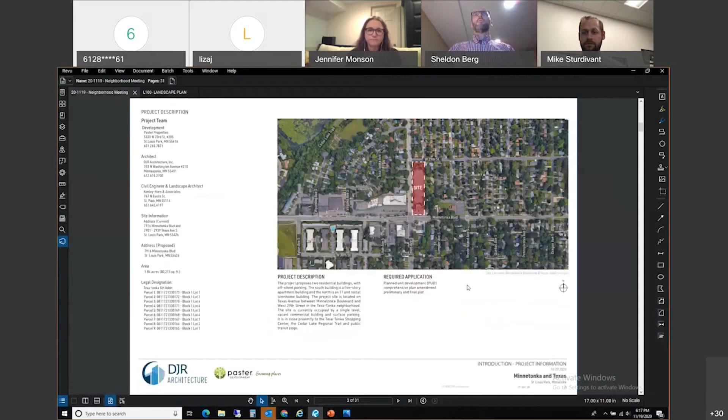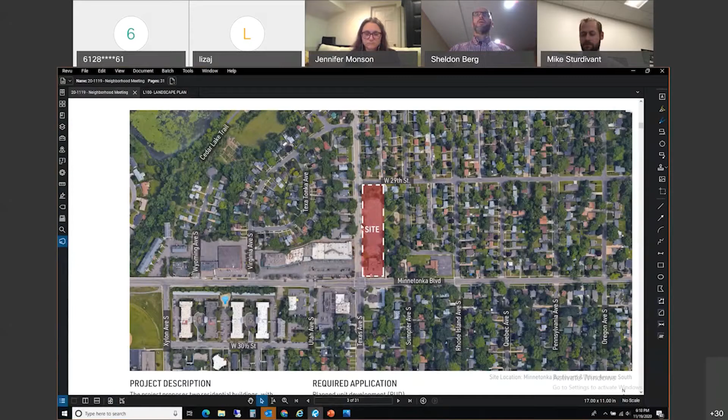Let me just page through a couple things. So just a sort of an orientation thing again, we're just on the east side of the Texa-Tonka shopping center, and then obviously just north of some of the other restaurants like Walk in the Park and things at the corner. We are developing the whole site that encompasses between Minnetonka Boulevard and 29th, just to the east of Texa Tonka. And then there'll be a link here in the middle to Rainbow Park as well.

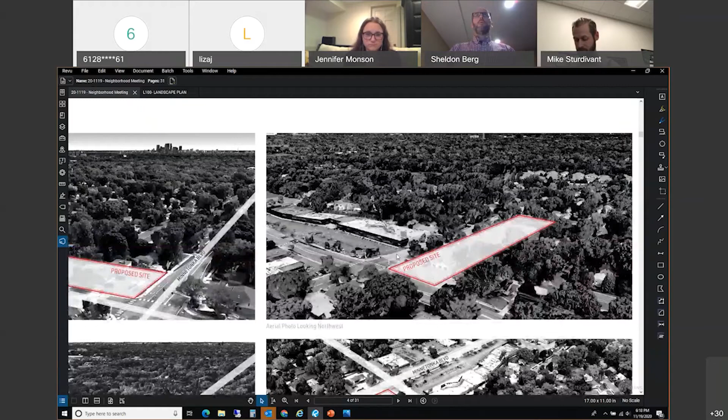Just some quick aerial views of where the site is. I'll jump through some of these fairly quickly because being with the neighborhood, you understand a lot of the context.

From a zoning perspective, the front half of the site was C2, now recently rezoned to C1, which is a little bit lower scale commercial use. The back end is currently R3, and we're rezoning the whole site together. All the units will be rental at this point, including the townhomes, and there's a total of 112 units that we're looking to add.

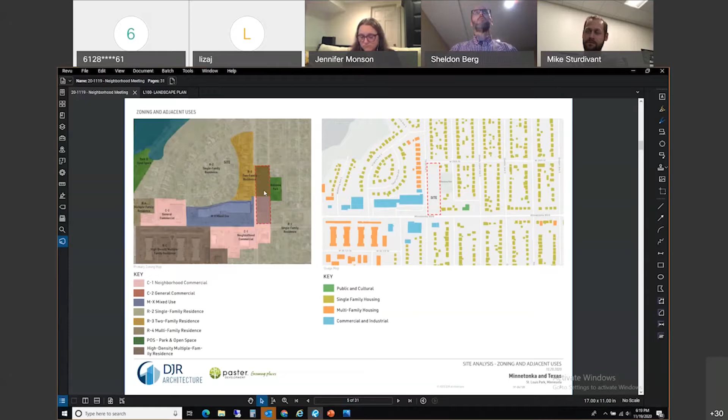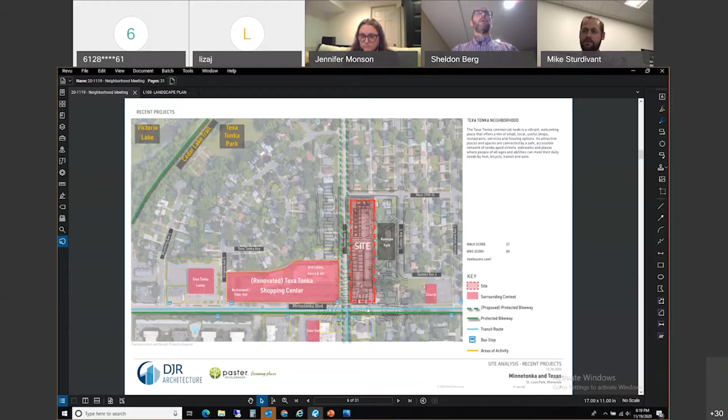Reiterating some of those points, we have some fantastic links to neighborhood amenities, to the Cedar Lake Trail, and to the bus lines along Minnetonka. We're hoping and planning for a lot of the new residents to take full advantage of those amenities.

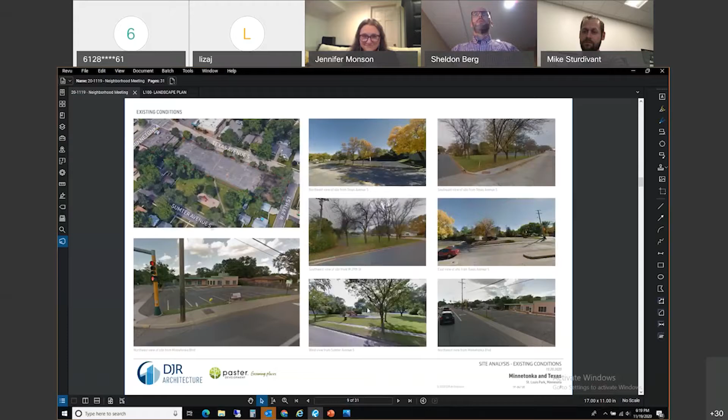Just some views of the neighborhood. I'll flip through some of these fairly quickly. So, a little closer look here. Hopefully everyone can see this okay.

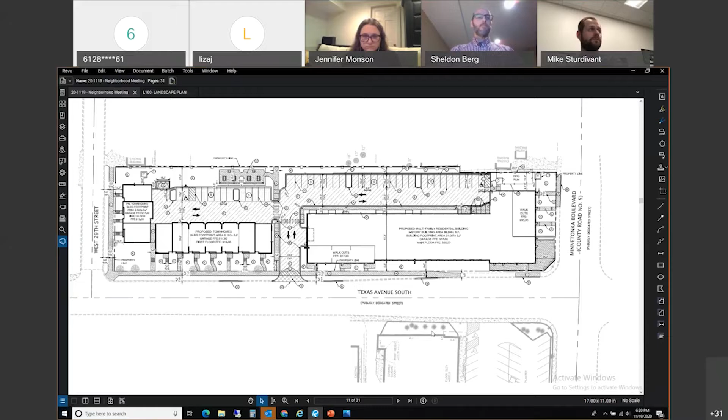Just to talk about the scale and context, let me zoom in here a little bit. As far as the setbacks of the buildings go, the townhomes set back about the same as the twin homes and other houses along this side of the street on Texas. We're actually set back even further than some of the single family homes to our east along 29th. Along Minnetonka, we're about 30 feet or so back from the street, which allowed some landscaping and front yards for the 3 units that we have facing the street.

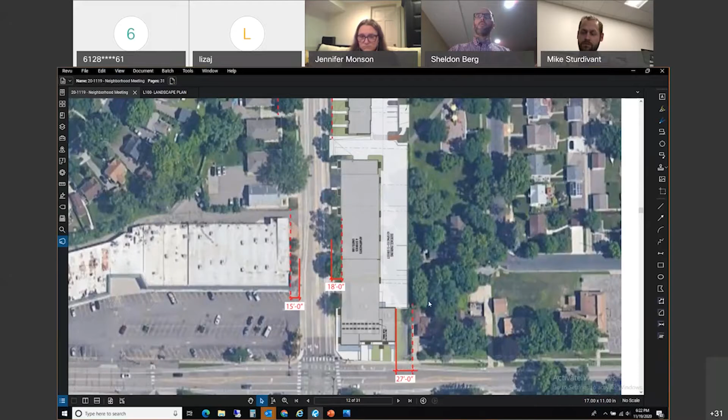We have a lobby space and some amenity areas along a little public courtyard out in front. On the side here, we have landscaping and a little dog exercise area, with some surface parking directly behind the building, which will be bordered by a fence and additional landscaping between the parking and our property line, which also borders a couple houses as well as the park.

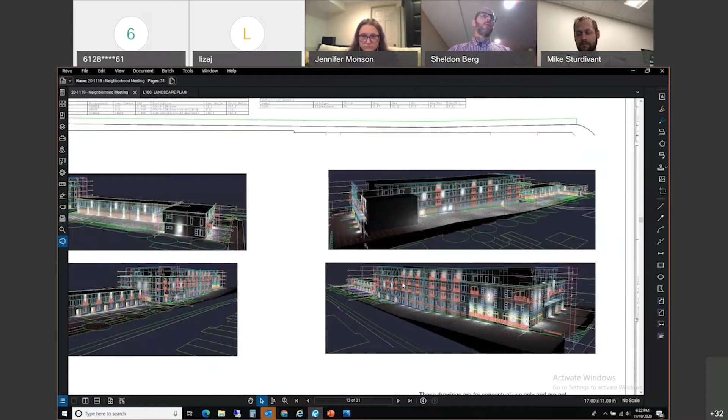So let me just move forward. This is a lighting plan. It gives a sense of some of the surface lights that'll be around the balconies, as well as some lighting around the back. I think the balance we're trying to strike is where it's lit enough that it feels safe for everyone, yet not so much lighting that it goes out into the neighborhood.

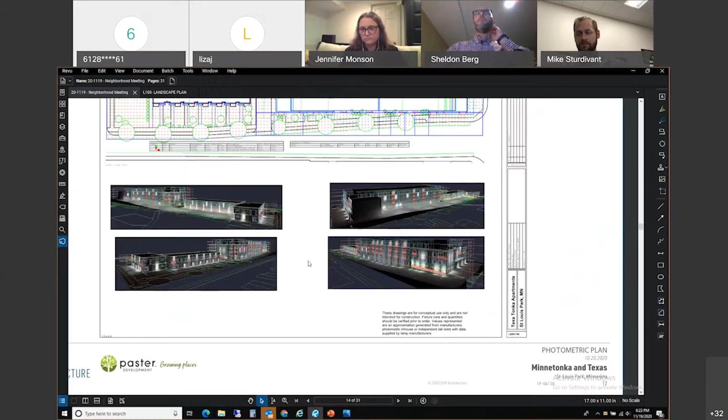One of the primary things we look at when doing a new building in a neighborhood, especially when adding some height, is how the shadows affect the neighborhood, what the surrounding houses and other buildings are like, and what effects they may have. The city has a standard to follow, where any new construction shouldn't shade more than 50% of a face of a neighboring building for more than 2 hours between the hours of 9 and 3.

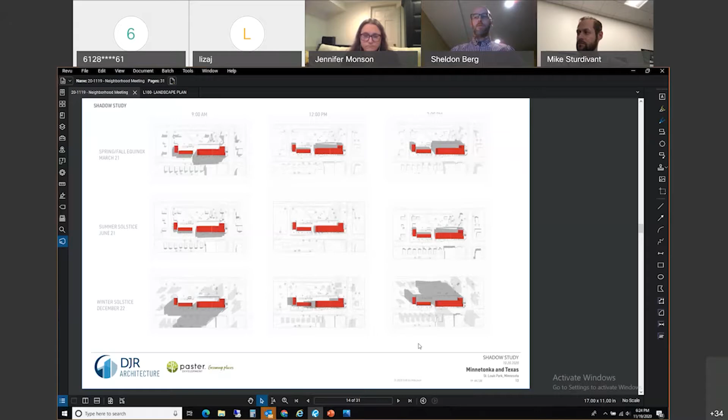This gives a general sense, starting with 9 a.m. here on the left side in the spring or fall. Summer, of course, you get a lot of high sun, so not a lot of shadowing there. On the right side, it's sort of that afternoon comparison between spring, summer, and winter timelines. I have a little enlargement of some views of that too, showing all the housing around here.

I think what you can probably see is you get some shadowing from the shopping center onto that house behind, but we have a lot of benefits from both the street bounding our site as well as the setbacks that we have, so we're really not impinging on any other neighbors from a shadowing standpoint.

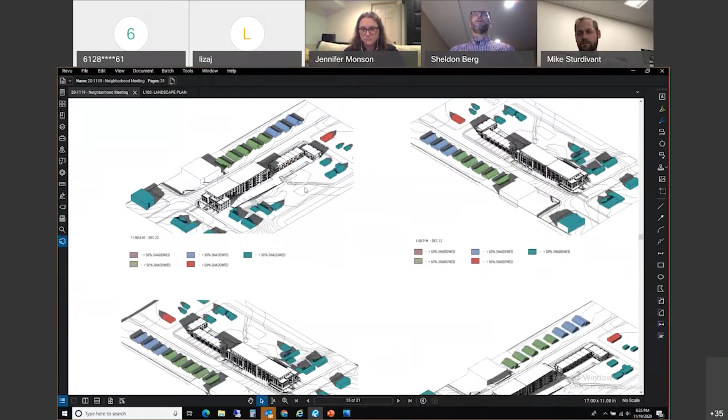I'll run through the plans briefly. Each of these townhomes has a walkout to the street. This just shows the buildings themselves, and then the parking behind in your garage.

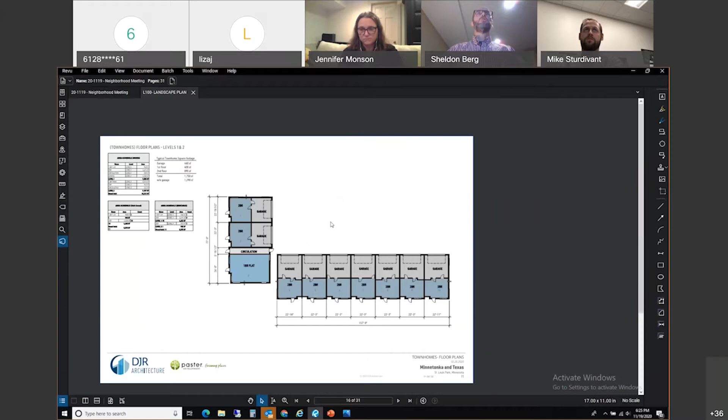Briefly, while we're back on the site plan, I'll make a slight change in what I'm showing here. I think it's easier to understand some of these things if you look at the landscape plan, so you can see some of those improvements rather than just a plain site.

One thing I'll also point out is currently there's quite a number of curb cuts on this site. There's one up here off of Minnetonka, one right around the corner as you turn onto Texas, and three more along the property.

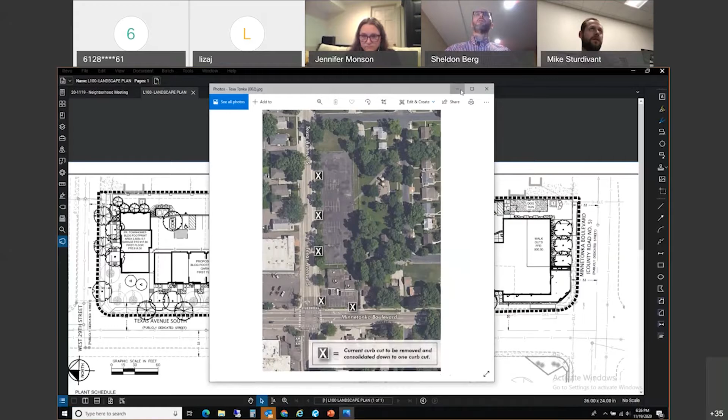If everyone can see this okay, this indicates all the ones we're taking out. There's 5 total today that we're taking out, and we're consolidating them into one here about midway through on Texas Avenue. We were very thoughtful in wanting to maintain that connection and keep the traffic as close to Minnetonka as possible, so there's really no reason for any of the residents to go into the neighborhood unless they're on a bike and want to get on the bike lane and go up to Cedar Lake Trail.

The other thing I'd add is, I think folks who have traveled in the area thought it was really important to remove especially some curb cuts along Minnetonka Boulevard. That'll just help the flow of traffic at the intersection.

You'll notice, though it may be hard to see on some screens, in addition to all these heavier black outlines showing the new trees we have, we're also saving quite a number of the good trees that are existing on the site currently. That was part of the site design, and part of our intentions going forward is to save as much of that canopy as we can.

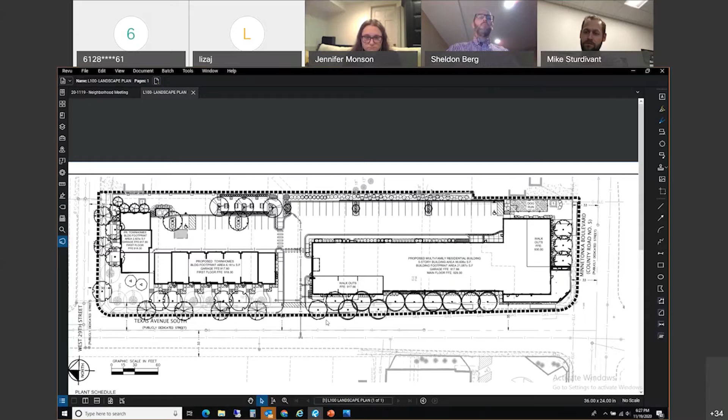So moving on, I want to run through the building elevations. These are the townhomes, and we have along the front a fair amount of brick on each of these houses, with a bit of an accent piece at the entry doors to add some artistic flair to them.

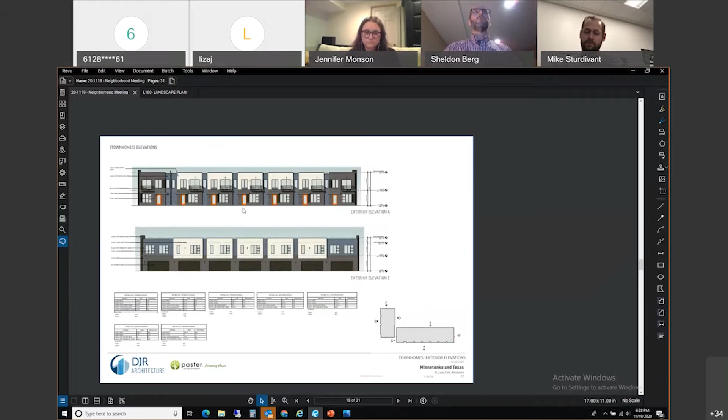A major part of our design as we were looking at this project and the Paster property, a large part of it had to do with looking at a lot of examples of mid-century modern projects as precedents for what we're doing with the building. This is the side that faces 29th, and then this is the connection point in the back, and there's also some link areas along here, and this would be an elevation off the end facing back toward the neighbor.

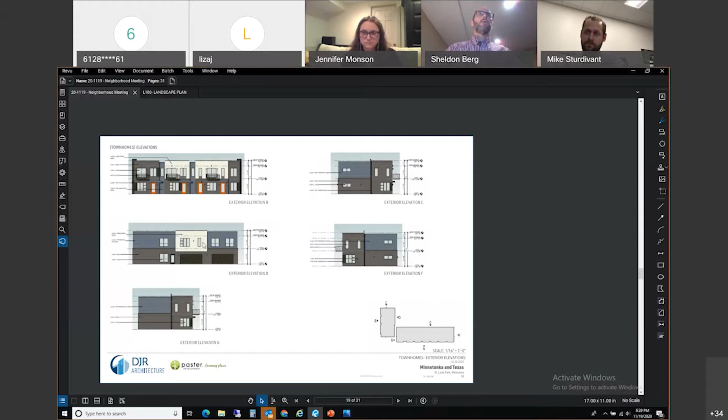In terms of materials, they're fairly consistent between the two buildings, the townhomes and the larger building: a base of brick, with siding in a couple different colors, a really dark blue and a very light gray as well. The metal for balconies and things like that will end up being probably much closer to a black color.

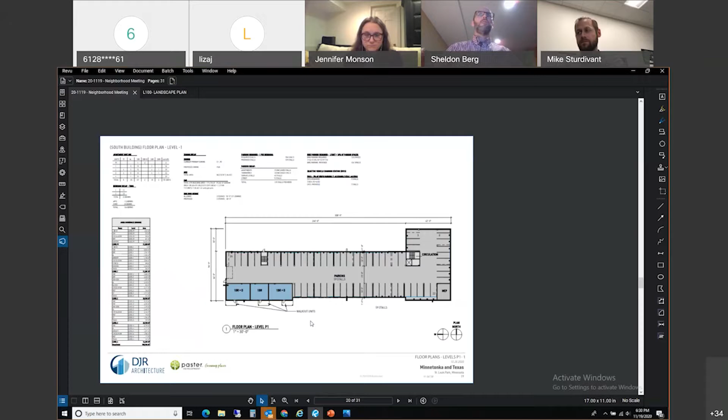This gives a sense of the parking underground because of the way Texas Avenue drops in grade as you go north. This whole portion up here is buried, and then you start to see part of that garage. We've also introduced 3 walkout units here that have direct access to the street to help add some vibrancy to that streetscape, as well as giving more opportunities for those types of units.

And then the main level, where you enter from Minnetonka Boulevard, there's an outdoor patio here with some amenity spaces at the corner, and then some more units that can walk out to Minnetonka. Like I mentioned before, they have a pretty good setback from the street, so they're not going to feel like they're right on the road. Gives them a little privacy as well. And then there's some additional units back here toward the north.

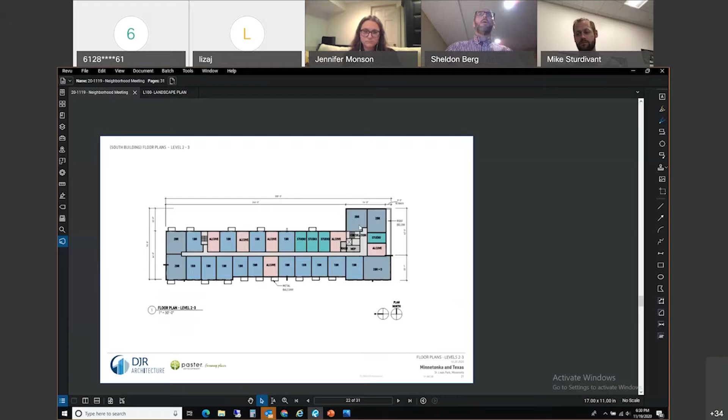Upper level is pretty straightforward in terms of unit layout. I think the next two pictures will show that.

In our sizing of the building, one thing that was important to us was keeping a pretty modest scale along Minnetonka, and then stepping down toward the neighborhood to the townhouses. So we've stepped the building back quite a ways along Minnetonka, as well as from the neighboring property. This is only 3 stories, and then it steps up to 4 at this point. Because of the grade change at Texas, you'd basically add a story to that. So this roof level, if you're standing down here on Texas Avenue, would be like the fourth floor.

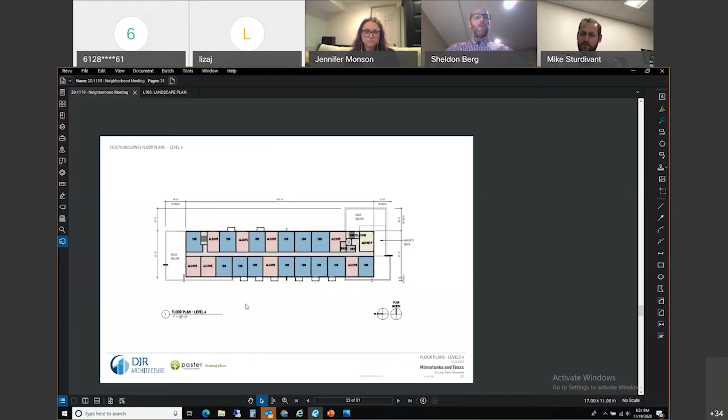I think the renderings later on will give a much better description of that. This is the grade change on Texas Avenue. This is the west elevation. You can see all the brick we have going on the base, and the units that walk out.

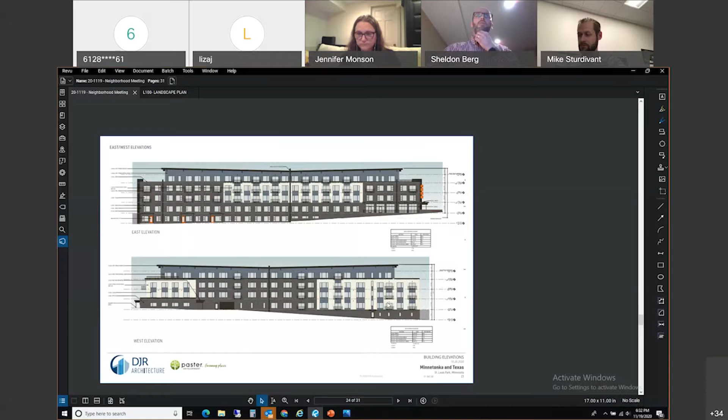This, of course, is the flip side, the side facing the park, with a couple of houses behind. And once again, brick siding, some metal siding. This is a painted siding here, fiber cement. And then the garage entries on that north end of the apartment building.

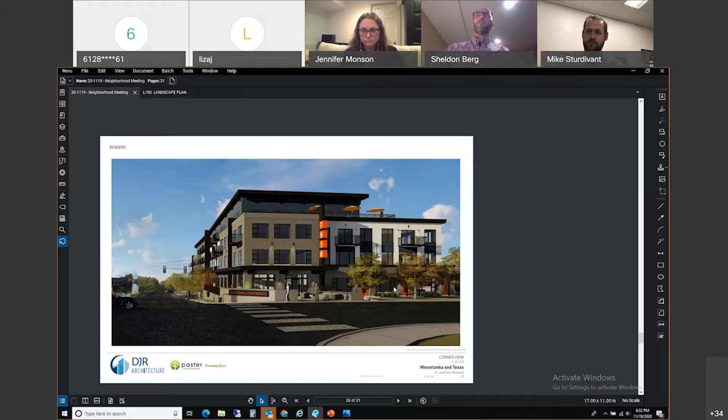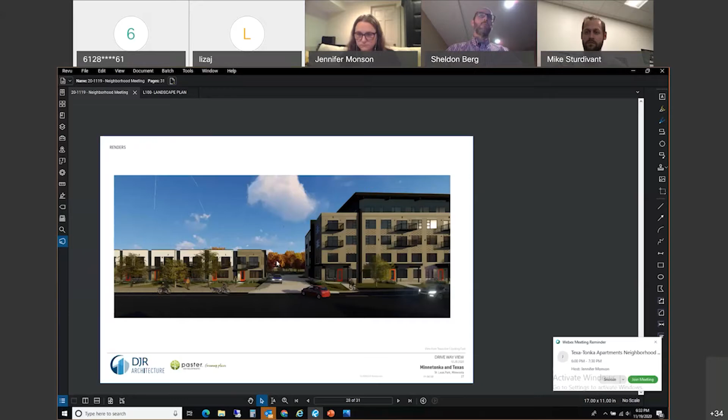So I'll flip through a couple renderings, which will give maybe an easier to understand feel. This is Minnetonka and Texas. Here's that 3-story element of brick and siding, with those walkout ground floor units right back there. And another view looking beyond to the Texa-Tonka shopping center. And this is a view showing that connection and the pedestrian link to the neighborhood, or to Rainbow Park, with the townhouses here on the left.

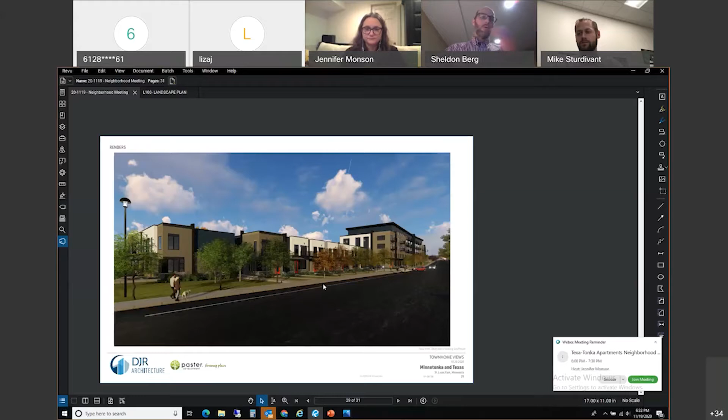As far as unit types, they are everything from studios that are probably around 450 square feet, up to 2-bedroom plus dens where you're closer to 12 or 13 or 1100 plus, especially in the townhomes. Those are a little bit larger, maybe more geared toward potentially small families. And then with the 112 units that we have, we're looking at 22, or 20%, of those units having an affordable component.

So, Mike, anything you'd like to add? Sheldon, if you want to flip back just briefly to the aerial with some of the setbacks, I just talked a little bit about that shot. Okay.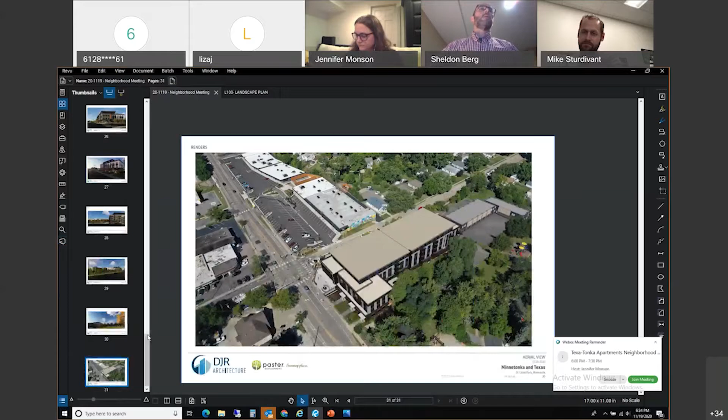Perfect, okay, so just wanted to talk about this angle for a moment. We're being very intentional here about where we're trying to concentrate most of the density, which is on the southern portion of the site, in kind of a more commercialized intersection. And then as we're stepping towards 29th, you can see we step down considerably with the townhomes as we get back into the more residential part of the neighborhood.

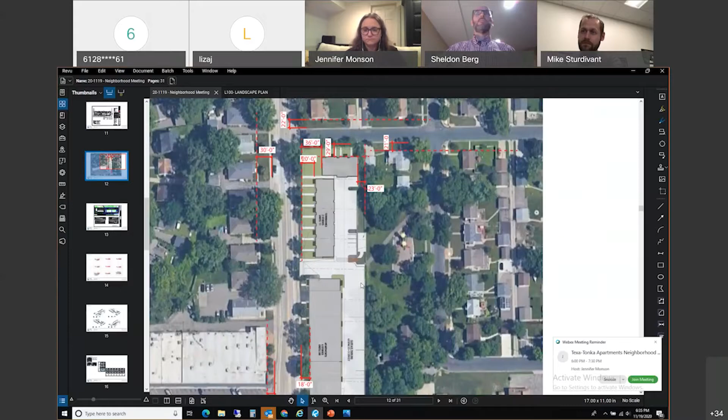Correct — yeah, Sheldon, other than that, both in height and in setback as well. The 2-story buildings for the townhouses here are meeting or exceeding what the existing streetscape is like in that area of the neighborhood.

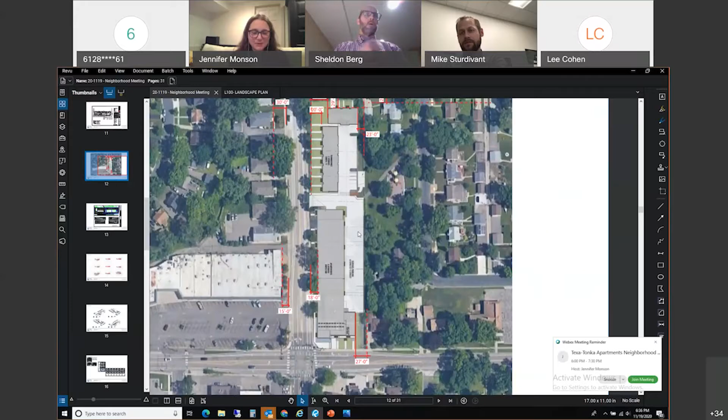Okay, I think with that, we could probably stand for some questions. If Jennifer, maybe you want to coordinate that, would that work? Sure, and actually, Mike and Sheldon, you hop back to the PowerPoint and I will go over some of the traffic analysis that's been done. Oh, sure. I know that's a concern and an interest of people, so I want to make sure we touch on that.

So in 2019, the city did a small area plan for the Texa Tonka area. As part of that plan, we did a pretty comprehensive traffic analysis to determine the capacity of the intersections around the commercial node. That study was completed by SEH Engineering. We're using that partially because all of the data on that traffic was collected prior to COVID, so we wanted to make sure the traffic analyzed was as close to typical traffic patterns, numbers, and movements as usual, not during this weird time during COVID where people are working from home. So we're focusing on that traffic study rather than another one, because we want the most accurate information. So if you go to the next slide.

Traffic studies aren't something everyone is well versed in, so I want to explain how they analyze intersections. Intersections are analyzed based on average delay per vehicle per intersection, and they're ranked on a level of service, or LOS, between A and F.

A is the best traffic operation, meaning traffic flows freely through the intersection with very few delays. F means there's lots of congestion.

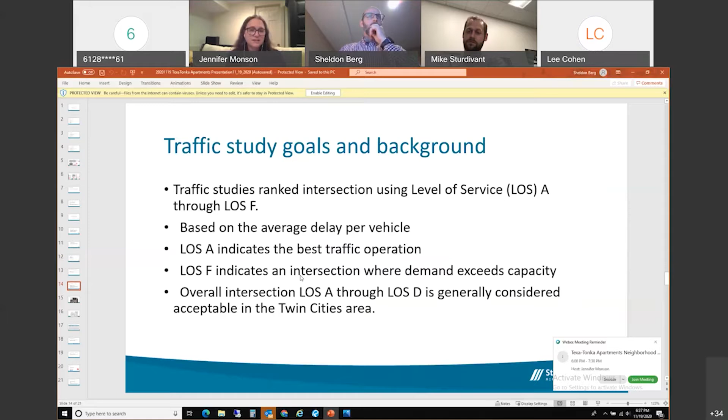It's really hard to get through the intersection, with long waits at stoplights and turning movements. Typically throughout the Twin Cities, level of service A through D is generally considered acceptable.

Let's go to the next slide. The traffic study for the Texa Tonka node focused primarily on the intersections marked with the little blue dot next to them.

We didn't focus on... sorry, Jennifer. Someone unmuted, maybe it's Lee? Unmute... there we go, just going to go unmute people. Thank you, okay, sorry.

The traffic study really focused on the commercial node and potential redevelopment of that node and how traffic operates at these major intersections. Traffic was assumed at the intersections east of Minnetonka to operate similarly or be affected similarly as these intersections to the west.

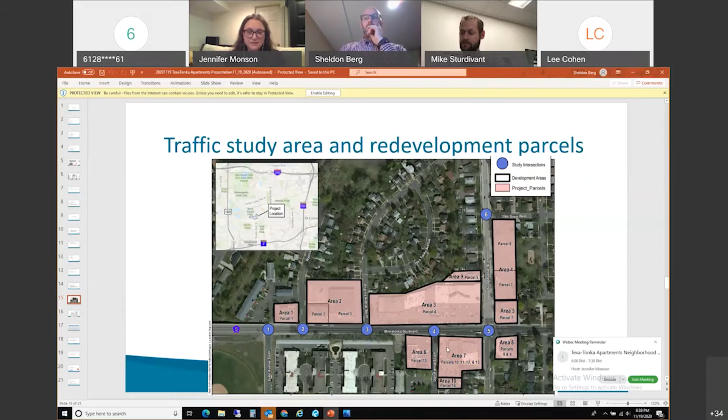If we can go to the next slide - this is the redevelopment concept looked at during the traffic study, essentially redeveloping all of the Texa Tonka commercial node into more mixed use development with commercial on the ground floor, residential above, as well as a multifamily building and townhomes on this site we're talking about tonight. So very similar.

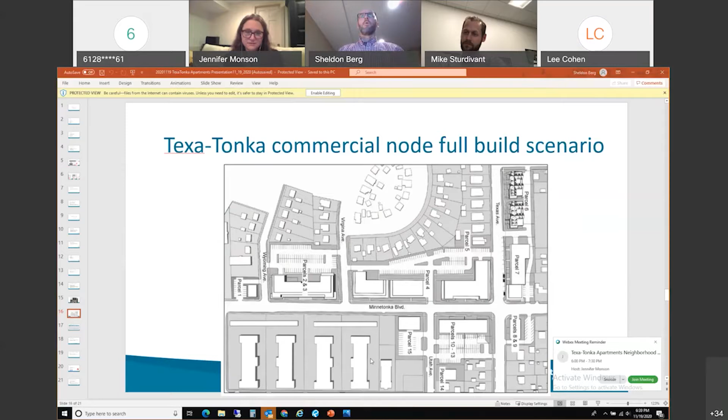Next slide. With that, all of the intersections were given an analysis and assigned a level of service and a delay.

They looked at what the existing conditions were in 2019, and what the existing conditions would be in 2030 if no changes were to occur to the Texa Tonka commercial area.

This essentially takes into account all of the background growth in St. Louis Park and surrounding communities using Minnetonka and Texas as their primary routes of transportation, and then a 2030 build scenario, which looked at what the numbers would be if all of Texa Tonka redeveloped.

As you can see, almost all of the intersections within the study area operated at a level of service A or B throughout today, in 2030 no build, and in 2030 if all of Texa Tonka were to be redeveloped.

The only intersection that had any change in level of service is Minnetonka at Texas, which went from a level of service A with a no build scenario to a level of service B with a build scenario.

But that delay is actually only 1.1 second - it's just on that threshold of A to B level of service.

Even if all of Texa Tonka were redeveloped, because the roads are designed to hold such large amounts of traffic, the actual effect to those intersections would be very minimal.

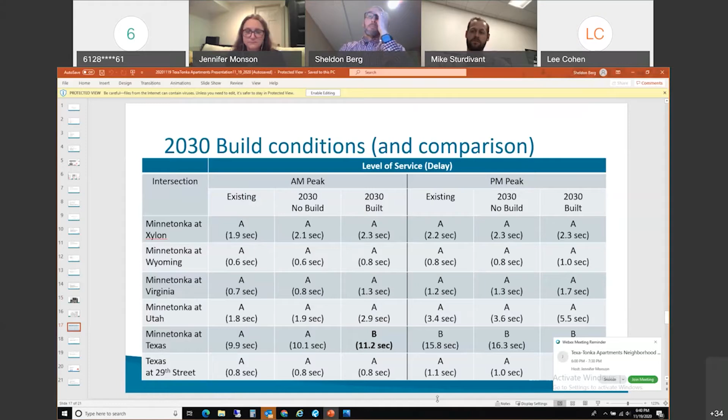Next slide. So again, all intersections operate at that acceptable level of service B or better.

Next slide. Some of you might be aware, but I wanted to bring to your attention that the city is working with Hennepin County to reconstruct the Texas and Minnetonka intersection. The plans are to lower the intersection about 3 to 4 feet to increase the sight lines.

Right now, if you're coming over the curve at the intersection, it's kind of hard to see if you're making right or left turns, so we're working on that. It's currently not funded in the county's 5-year capital improvement plan.

So the construction date is to be determined, but it's something we're working on, and something the city is pushing to get included in the county's funding budget.

More details on that, but this development proposal has been designed around the city's future plans to lower the intersection. And Jennifer, just to clarify, that's a separate project that was planned before this proposal.

Yes, the city's been working on this for a number of years. We know that it's an issue. We would have liked to have done it as Centerpoint was doing the work recently along Texas.

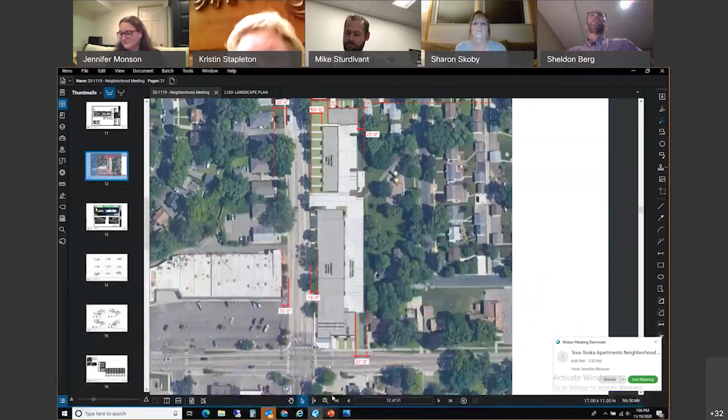The entry to that parking area is just inside of the access from Texas, so it's right on the north side of the building, which takes advantage of the way that the road dips down here, and then we're able to enter into that garage there.

I live on Texas Avenue, right across from the empty lot. I don't understand where you're talking about. Are you able to see the screen, Kristin? Barely. Let's see, a little better. If you think about where the shopping center is, and start counting the houses, we're about 2.5 houses down from the north side of the shopping center is where that access point is.

Right where I live. Are you across the street there? I'm a couple houses north of the dentist. Okay, and they're here, aren't they? At the first one? Correct. Yep, okay.

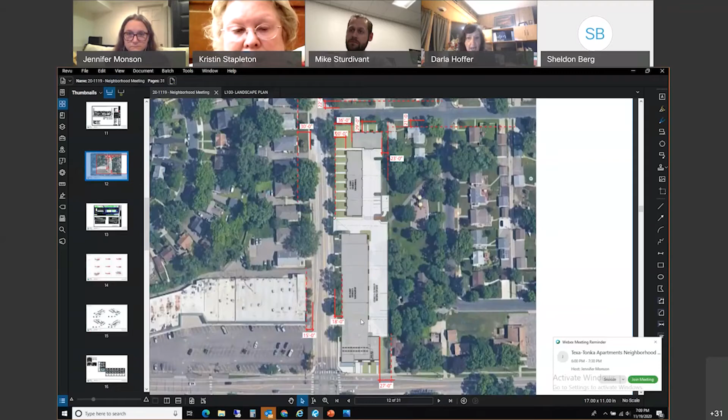I also looked at the studies. I don't remember this being this tall. I don't remember a lot of it, because you can't read blueprints. Most of us can see them, but we really don't look at them that well. So I guess I'm just commenting and saying, what's this going to do for my taxes? What is this going to do to my property value? And it just doesn't seem very realistic to a residential neighborhood. And I'm very upset about it. So thank you.

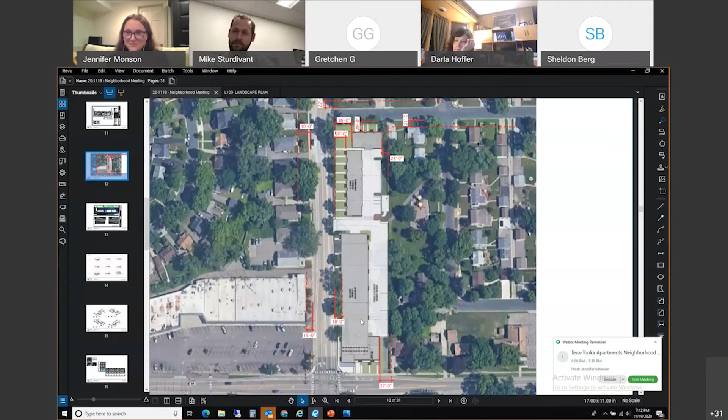Yeah, I'm a resident of the neighborhood. I live one block from the proposed development, and I'm in full support of the project. I think it's a thoughtful design, combining it with the commercial next door. So I just want to say I fully support the project, and I live very close by.

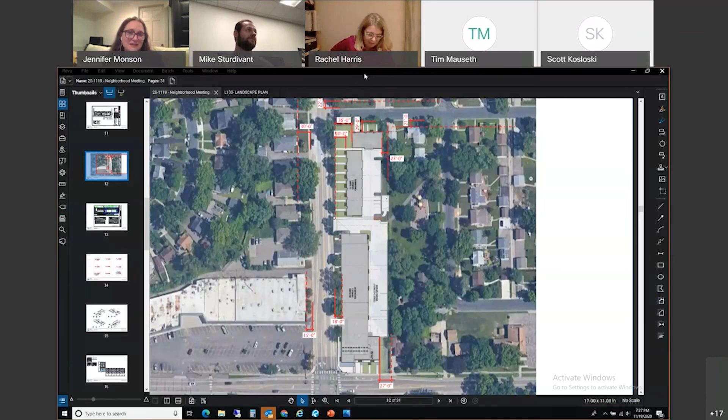Once developed, who will manage the apartment day to day? Is that a different company than Pastor Properties? At this point, it appears to be Steven Scott Management. We've worked closely with them for a number of years, and they help us out quite a bit on the housing side. They are also a local St. Louis Park-based company.

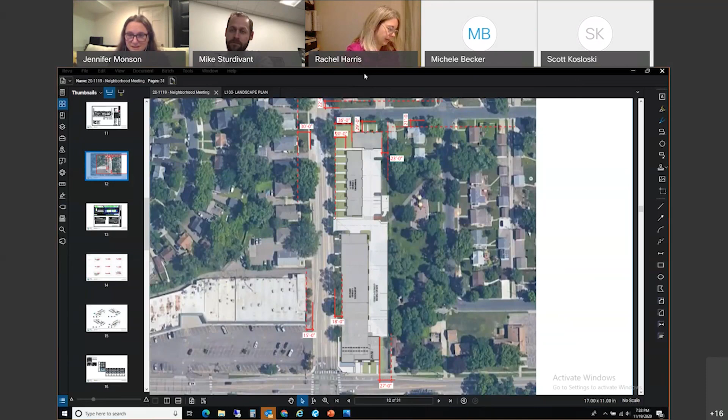And then question from Emily, will any changes be made to the plan based on this virtual meeting before it goes to the Planning Commission? That's a great question. Like all these meetings, we take all the feedback that we heard tonight and take as much of it into consideration as we can. So I think that's about all I can say at this point about that.

I'll also add, if any of the plans do change, they will be posted to the city's website prior to the Planning Commission meeting. So all meeting details will be posted to that website. Keep an eye on it. It's the bit.ly link that was sent as part of the neighborhood flyer and was posted to Nextdoor. That bit.ly link automatically goes to the city's web page for this development proposal. So you can keep checking back and it will be updated as I have new information to update it with.

I don't see any more comments and no one's hands are raised. So I just want to thank you all for coming to tonight's meeting. Thank you, Mike and Sheldon, for your presentations and holding the virtual neighborhood meeting. We appreciate the opportunity to get additional feedback from our residents. Our pleasure. Thanks for being such a great virtual host.